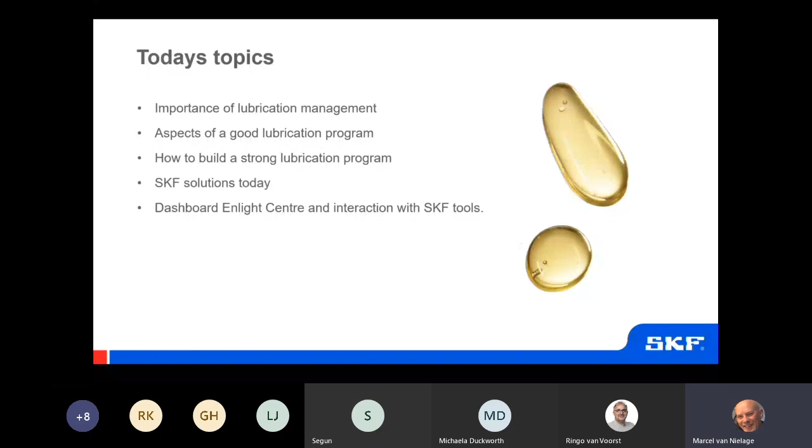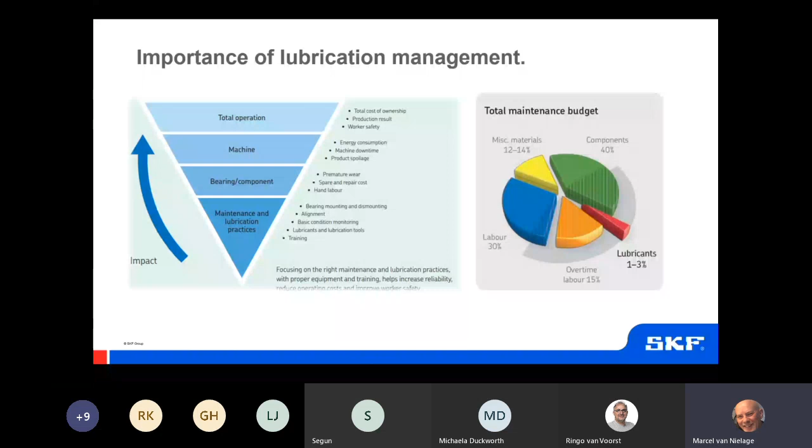In our data, we also see that lubrication is the most common failure mode of premature bearing failure. And within this failure mode, we also divide it into some aspects of lubrication problems. One of the most common problems is lubricant contamination. It's a failure mode that occurs very frequently. Also, the chemical degradation of the lubricant is a failure mode that we see a lot of times. And choosing a wrong lubricant, the wrong type or the wrong grade, also gives a lot of premature bearing failure and function loss of rotating equipment.

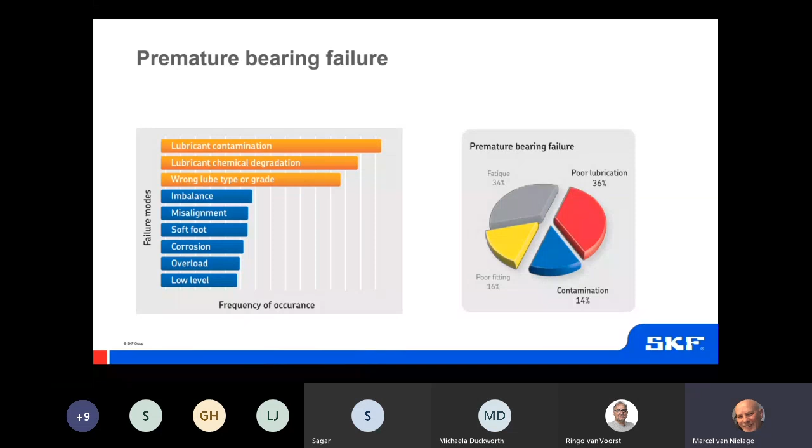So premature bearing failure is a very common problem caused by lubrication practices that are not on a good level, or let's just call it bad lubrication practices. The impact of best practices. What will be the impact of bad practices or best practices? Well, if you bring your lubrication management program to best practice level on certain aspects, it will surely increase safety, health conditions, machine uptime and reliability, for instance. And it will reduce a lot of problems like energy consumption due to friction, noise, unplanned downtime, operating expenses, actually your maintenance costs overall.

Best practices can help you increase your reliability, increase production quality, and reduce all kinds of problems that give you additional maintenance actions and maintenance costs. So it's very important to see if you can bring your lubrication management program to best practices on certain levels.

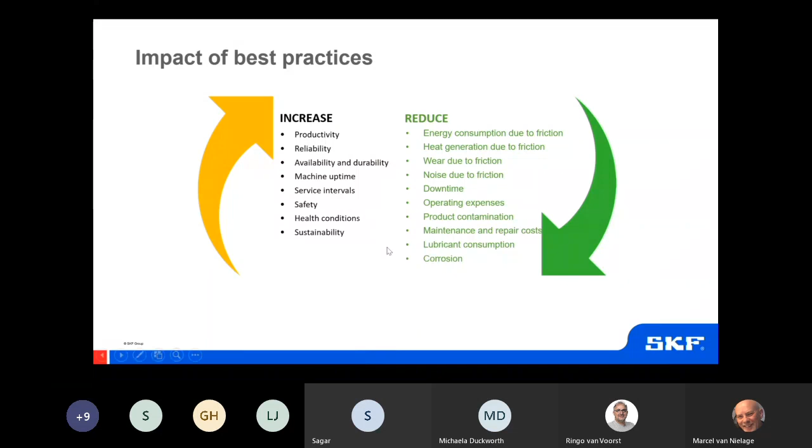What are the aspects of good lubrication? Well, it begins, of course, with the selection of the right lubricant, the quantity, and the intervals. Most of the time, companies use one lubricant that they lubricate a lot of equipment with. The quantity is most of the time based on how OEMs advise to lubricate, and the same goes for the intervals. But actually, you should see if you can build a program based on operational parameters of the equipment,

like number of RPMs, starts and stops, the temperature of the environment where the equipment is operating in, and, how do you say that in English, the load on the bearings is a parameter in the calculation to see if we can lubricate equipment based on operational parameters. One thing which is also very important is avoiding contamination.

Lubricants can be contaminated in several ways. It starts with handling in your storage, the tools you use when you start to re-lubricate the equipment in the field. Every time you do a handling, lubricants can be contaminated. Using the right tools and methods to lubricate is also very important.

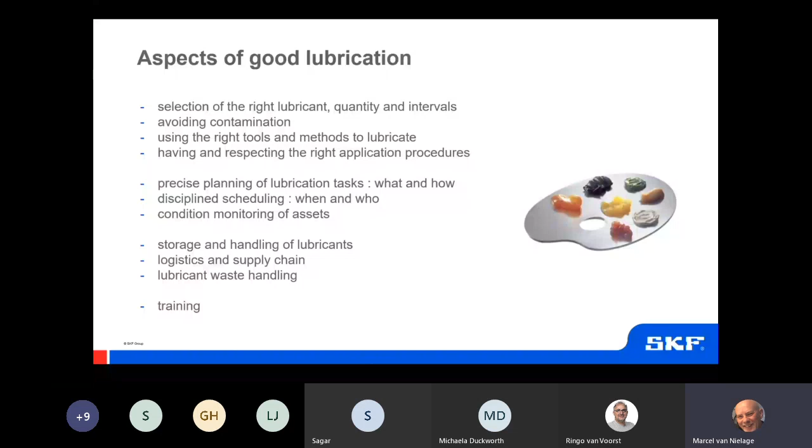So, when you want to build a strong lubrication program, the first step is to analyze your as-is situation. You can never improve if you have no insight into your as-is situation. And the second step could be that you have a lubrication audit on your as-is situation, just to take a deeper dive into the as-is situation on certain aspects.

So after determining your as-is situation, an improvement proposal can be made. In other words, a roadmap to improvement with certain projects on certain aspects to improve your lubrication management program. If this is all done, then it's a matter of designing these improvement projects and implementing them. Once you have implemented them, you have to optimize and continuously improve the program to keep a continuous improvement loop in your lubrication management program.

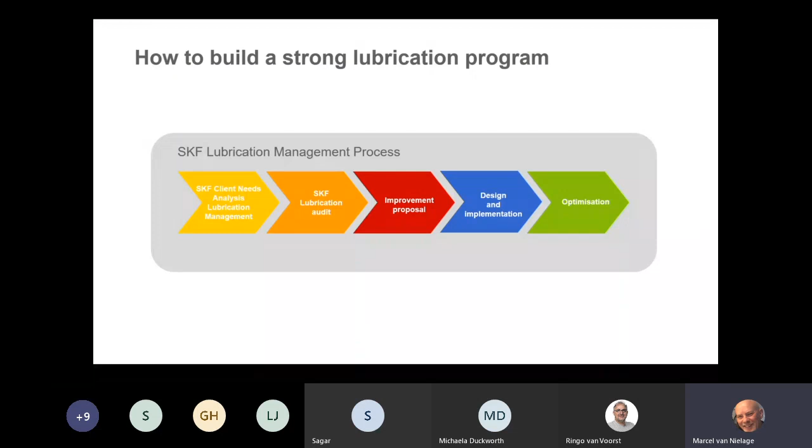So process step number 1, we call a client needs analysis on your lubrication management. This is a structured process to benchmark against world-class performance and industry average. We have done that a couple of hundred times, so we have a big database with figures that tells us what is the benchmark and what is best practice.

And this analysis is a one-day interview with several people within the organization, like a maintenance manager, a planner, a maintenance engineer. We also interview people who lubricate. And after that one-day interview, we analyze the data. We upload the data into a piece of software within SKF. And we produce a report.

Well, there are 5 areas that we investigate. There's the strategy area. How is your lubrication management program strategy built? How do you identify problems in the field, and how do you act on these problems identified?

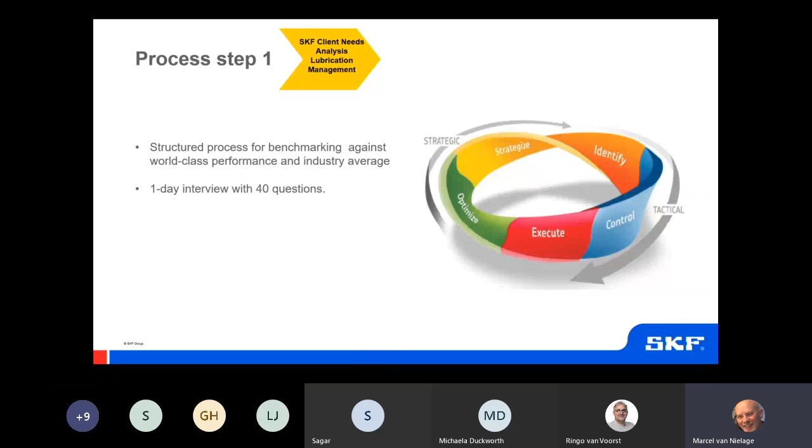To design all this and to investigate, the analysis is built on the SKF Asset Efficiency Optimization model, which you can see in the picture on the right side. So it all starts with business goals, like unplanned downtime. How much unplanned downtime do you accept? Environmental issues, safety issues, high costs, and all these risks of not accomplishing your business goals.

We have summarized them in a risk matrix, and this risk matrix is the basis for your maintenance strategy. So a maintenance strategy is built on risk. We call that risk-based maintenance. And lubrication is a part of your maintenance strategy, of course.

So also for lubrication, you can ask yourself, do you know why you do what you do? Why do we lubricate? Why do we lubricate this amount with this frequency, this type of lubricant in the equipment, using these tools? So that's the strategy part of building a lubrication management program.

Then we have the second phase, the identify phase, and it's very important. Can you turn this strategy into practice? For instance, do you monitor your equipment with vibration or noise or another way of predictive maintenance, just to identify problems in the field, but also monitor the performance of your lubrication program? Do you have operators doing walkarounds with condition monitoring tools and see if there's any leakages or any lubricant spills, stuff like that?

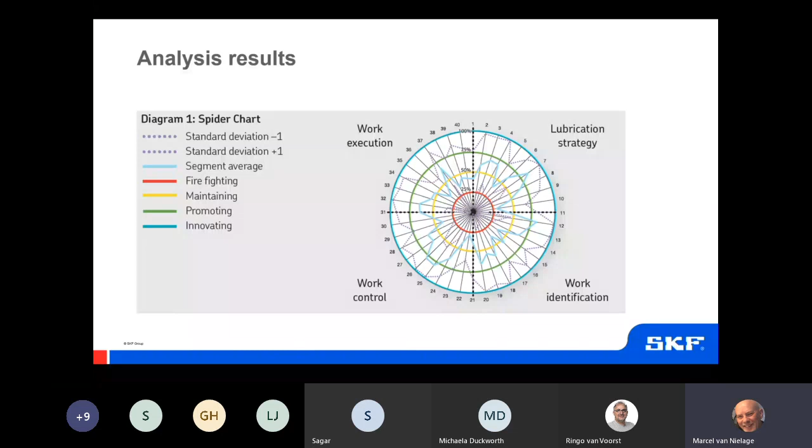It's absolutely not necessary to have world class on 40 aspects of a lubrication management program, because it would not add any value, and it would cost a lot of money to do that. But it's very important to bring certain aspects of a lubrication management program to world class level, or at least promoting, and gain all the advantages of best practices.

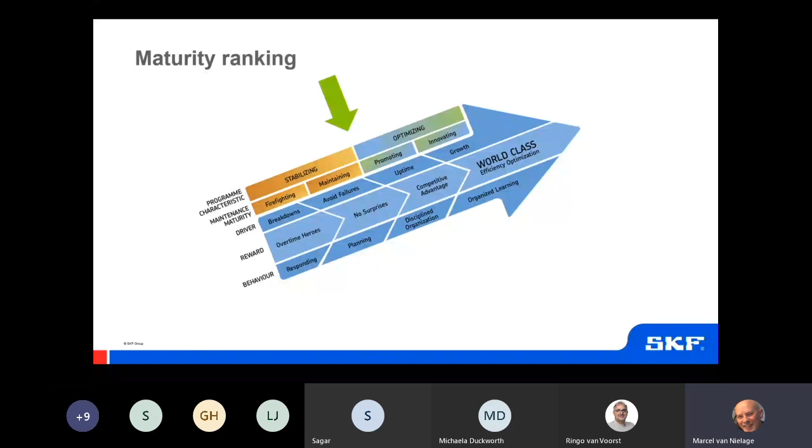So we dive deeper into 10 sections, like for instance your supplier selection. Where is this based on? How did you select your suppliers? We also look at how many automatic lubrication systems you have installed. Installing automatic lubrication systems gives you a lot of advantages when it comes to contamination, avoiding mistakes and stuff like that.

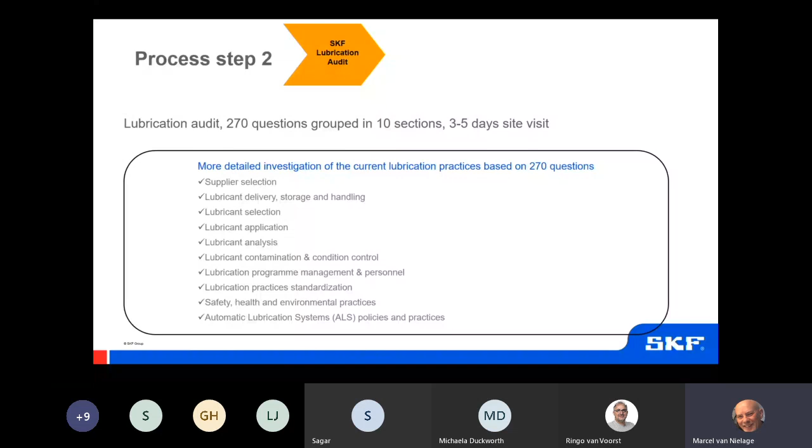So this audit is an additional investigation to be 100% sure that we have a very clear insight into the as-is situation of your current lubrication management program. If the as-is situation is fully clear, then it's time to make a roadmap to improvement based on the outcome of the audit and the client needs analysis. These improvement projects are determined together with the company that has been investigated, and it's based on where the biggest gaps are.

It's based on low-hanging fruits, which projects will give us a quick benefit, and it's also based on how these projects must be invested. Is it capex or opex? Opex projects can most of the time be started real soon, and capex projects most of the time take some time to get the investment ready and start.

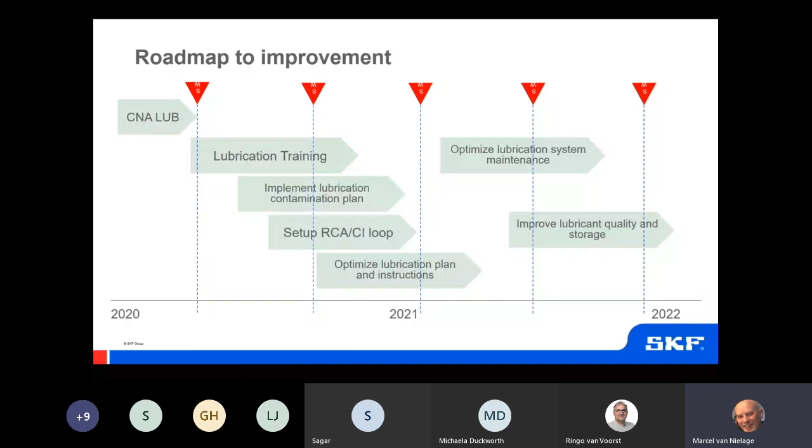For instance, lubrication training is a typical thing you can start immediately, and it will give you a big advantage if the people who are lubricating your equipment are trained and know what they're doing. While optimizing or implementing a lubrication plan itself based on operational parameters can take a lot of time and will not bring you a direct advantage because of the time it takes. So your roadmap to improvement must be based on quick wins and on projects that give you a sustainable program.

So if the roadmap is built, we have the preparation done. We have analyzed the as-is situation. We have full insight into this situation and the gaps. We have made a roadmap to improvement, and the next step is to design and implement the improvements and start optimizing. Optimizing is probably one of the most difficult things within a lubrication management program, because of time, but also because of attention.

It's very important that people who lubricate give you information from the field where faults are hidden, so that they can be made visible. Your condition monitoring data is a parameter that gives you insight into faults and possibilities for continuous improvement. But you cannot improve if you don't measure your as-is situation. So we have some performance KPIs that have to be defined and set, and one of the most important things is that these are measurable KPIs. A lot of times KPIs are defined that afterwards are not measurable, so that might be a problem.

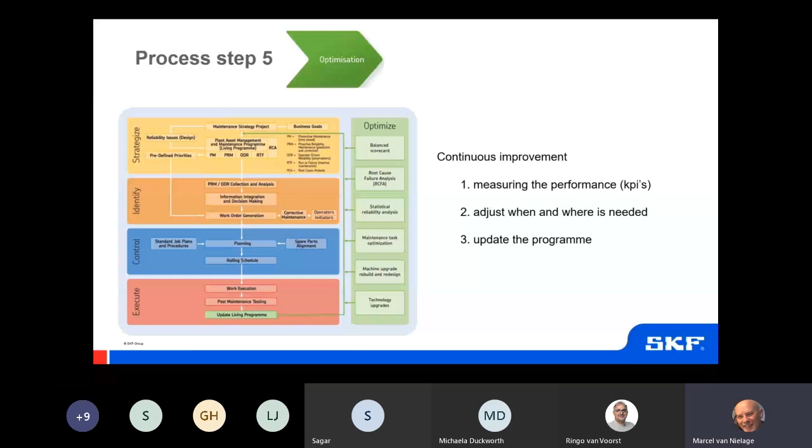The second step is, if you have measurable KPIs and you start measuring, you have to adjust them when and where it's needed. And after that, you always have to update your program based on these measurable KPIs. We use the same process, the asset efficiency optimization model, to measure and eliminate faults. So what do we see in a typical customer journey?

Companies that have a solid and well-functioning lubrication management program have installed a lot of automated systems. This gives you a lot of advantages. It's time effective, it's cost effective, it's much safer than having people walking around in your factory lubricating manually. It also limits your resource needs, so it gives you a lot of advantages.

Companies that don't have a very mature lubrication management program do a lot of lubrication by hand. Of course, you cannot automate everything, so there will always be some equipment or lubrication points that have to be lubricated by hand, but it always gives you some safety issues. There's a lot of room for making mistakes, and it's resource intensive. So there are a lot of premature failures because of poor cleanliness control with manual lubrication, while automated systems give you a lot of contamination advantages.

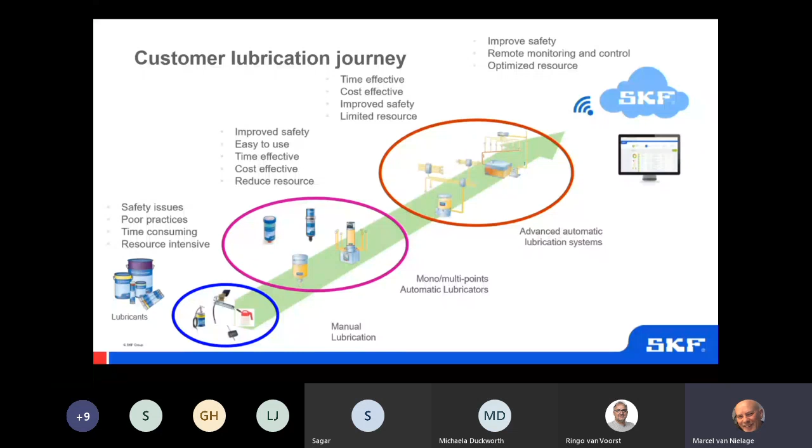One of the newest SKF single point lubricators is the SKF connected lubrication we call TLDD. It's a single point lubricator with a battery and a motor drive, with a Wi-Fi system installed and a dashboard, and it's visible on a cellular phone if you want. We can have about 2,000 of these single point lubricators connected to one gateway, and in the dashboard on your phone or laptop you can see how they perform.

These lubricators have about 2 kilometers range, so most of the time only one gateway is needed, but it depends, of course, on the number of obstacles between the gateway and the lubricator. These single point lubricators give a lot of advantages when it comes to contamination control, having the right lubricant in the right amount at the right time. And the dashboard shows you the performance of your lubrication as well.

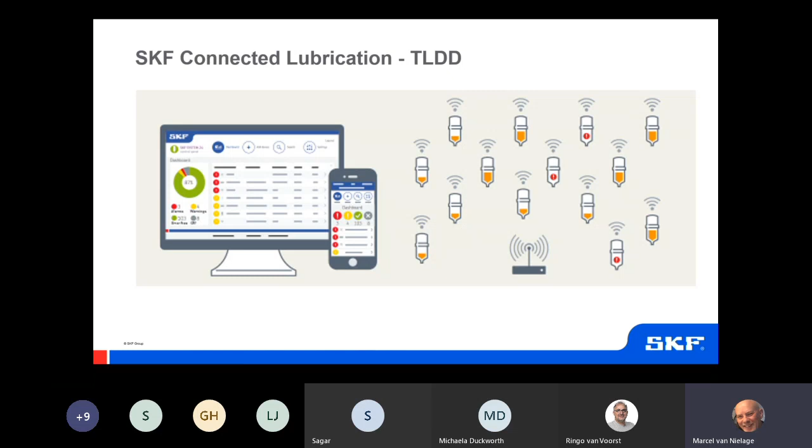It works more or less like this. So we have this connected lubricator. It's based on the existing System 24 single point lubricator. It has a motor drive and some LED lights on the top to give a status of its functioning. And it communicates via LoRa communication to a gateway, which in its turn communicates with the SKF cloud and our user web interface.

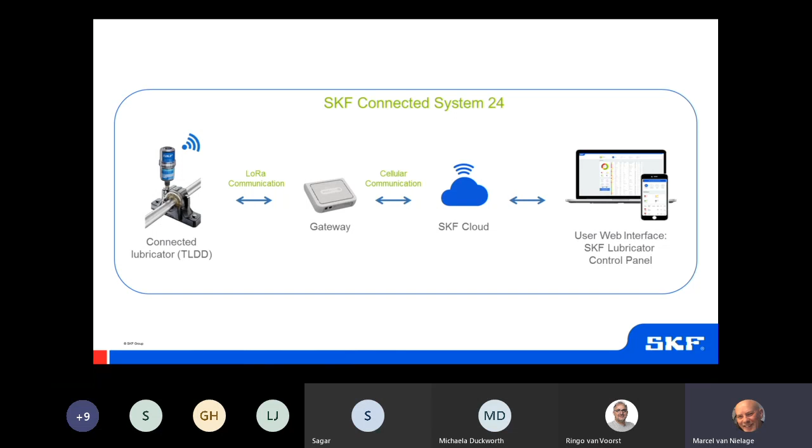We call this our lubricator control panel. In this control panel, we can see certain parameters of this system, and we can see in an overview, for instance, how many of the lubricators are installed, how many of the units have an alarm or warnings. We can see on which application they are installed, the asset tag number. We can give an asset name. We know the location of the lubricator, the signal strength.

You can also see the fill, how much lubricant is still in the cartridge, and within how many weeks it'll be empty. What we also can see is how much lubricant it consumes every month. So we can monitor if an equipment is consuming too much lubricant, and this control panel can, for instance, also shut down the units. So if a factory or an equipment shuts down for a while, we can also shut down the lubrication unit and restart it, of course.

Combined, for instance, with vibration monitoring, we can also adjust the settings of the lubricator from the control panel. So if we see in vibration data, for instance, that we have some lubrication problems within a bearing, we can adjust the amount of lubrication added. We can give more, or we can give less, and see what the influence is on the lubrication performance.

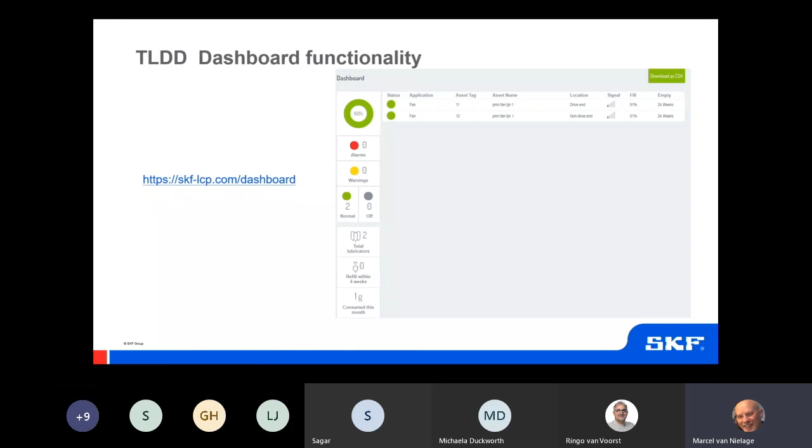So to monitor the performance of your lubrication program, we can install online systems. These systems continuously monitor equipment with vibration data, temperature. We can also add additional data like RPMs, pressures, or other data. We have single point wireless vibration and temperature sensors that communicate with this dashboard via a gateway.

And we have the SKF QuickCollect app, for instance, or the SKF ProCollect app, using the QuickCollect sensor, where we can build a complete inspection round, including lubrication, to collect all kinds of data in the field, add it to our dashboard, and make some analysis on equipment performance. So these are the tools that can be used to monitor your lubrication program, and to make your lubrication connected.